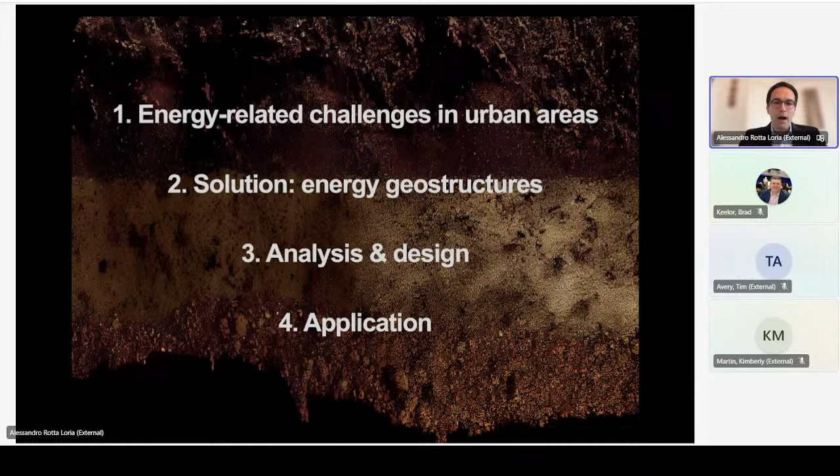Now, let's start by talking about energy-related challenges in urban areas, and why am I going to focus on urban areas? Well, because despite urban areas and cities occupying only 2% of the world's surface, they host up to 50% of the world population, account for 75% of the global energy consumption, and up to 80% of global CO2 emissions. So essentially, the message is that human settlements can span across different territories, but most of us live in cities.

Recent statistics indicate that every month, a new city the size of London is constructed around the world. So really, most of us live in urban areas. Urban areas consume a tremendous amount of energy, and due to the customary reliance on non-renewable energy sources, they are a big contributor to global warming and climate change.

Now, despite the current interest in the electrification of our world, if we break down the energy budget, the energy bill in our buildings, we can see how, depending on the country, 40 to 80% of the energy we consume is actually used for space heating and cooling and hot water production. If we take the city of Chicago as a reference, approximately 45% of the energy used in buildings is really used for these applications.

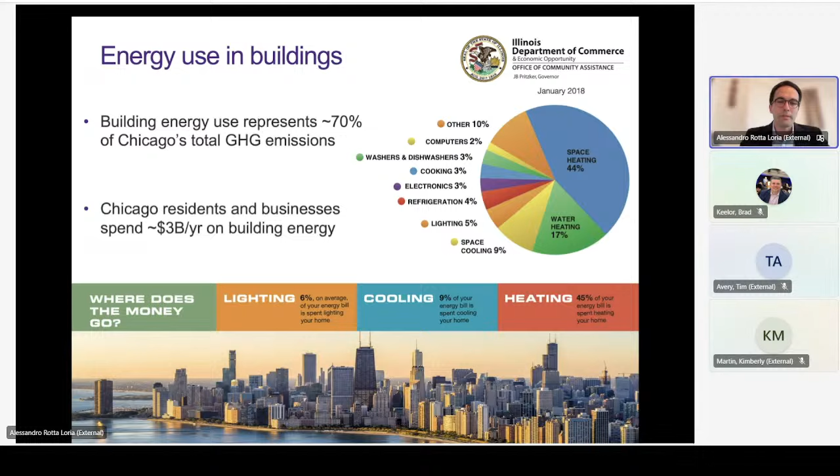Now, of course, electricity can be used to produce heating and cooling, but if we were able to source thermal energy directly instead of converting electrical energy into heat, we would have much more effective applications. A possible way to do this is through the harvesting of geothermal energy, the most abundant renewable energy source available on Earth right after solar energy, which I'm used to introducing by showing these two posters designed by Frederick Charles Herrick for the London Underground.

The message of these two posters is that when it's hot and sunny at the ground surface, temperatures are cooler below. And on the other side, when the ground surface is cold, it is warmer below. So the key message of these posters is that, from a broader perspective, the temperature in the ground beyond a few meters of depth is relatively constant throughout the year, being warmer than the ambient temperature during winter and cooler than the ambient temperature during summer.

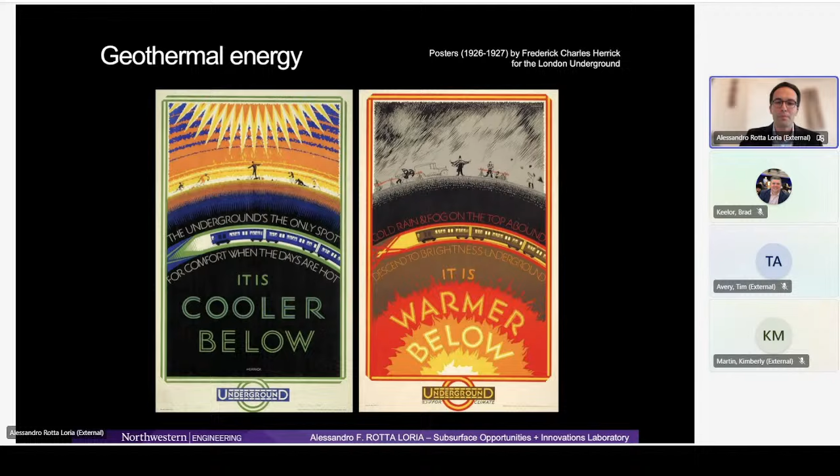And so essentially, all shallow geothermal technologies, or geo-exchange as we call it in the US, rely on this fact, that the temperature in the ground a few meters of depth is constant. This principle essentially allows us to source this heat for the heating and cooling of buildings and the production of hot water. Here you have data that have been measured in the ground around the world.

And really, you can see how the temperature remains relatively constant with depth. Of course, there is the geothermal gradient of approximately 3 degrees Celsius per 100 meters of depth. But if you consider the first, let's say, 100 meters of depth, you typically deal with relatively constant temperature, again, if you neglect the first 4 to 5 meters, where you do have an influence of the surface climatic conditions.

Now, this fact is valid everywhere on Earth, irrespective of where you are. Of course, if you are close to volcanoes, you are going to have more significant geothermal heat. But really, the fact that the temperature is constant is true everywhere. Now, if you instead consider cities, instead of rural areas, you can see how around the world, there typically is an offset in the temperatures with depth.

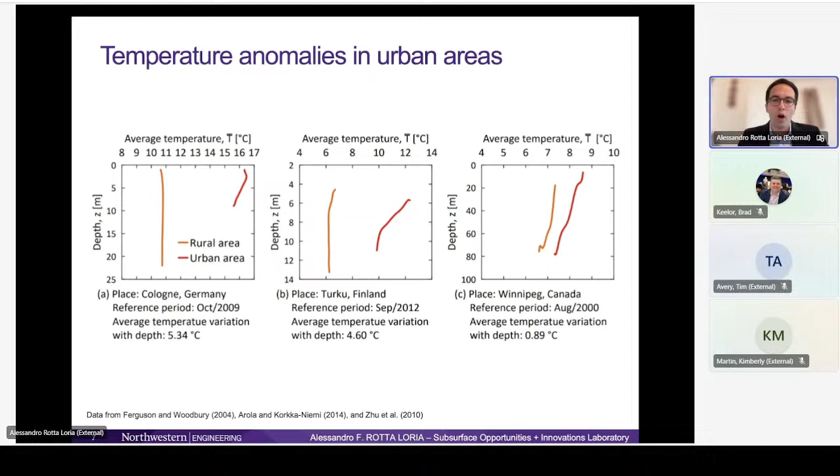And this is due to so-called subsurface urban heat islands, a phenomenon that essentially consists of an underground climate change associated with average temperature rises in ground temperature of up to 2.5 degrees Celsius per decade, which, put into perspective, is higher than the rate of surface global warming.

And this is due to the fact that all underground structures, such as building basements, parking garages, subway tunnels, train tunnels, and so on and so forth, continuously reject heat into the ground, no matter how well they are insulated. And so this is really causing an increasingly ubiquitous phenomenon.

And really here the message is that on top of having geothermal heat everywhere on Earth, when we are in urban areas, we also have substantial amounts of waste heat that we can harvest, and we can harvest it with geothermal technologies.

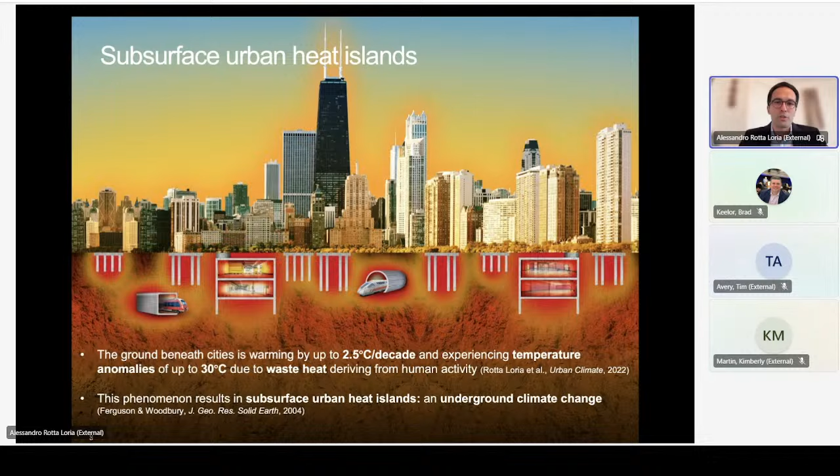Now, later in this presentation, I will show you how we can do that. But before that, let me expand a little bit more on this phenomenon of subsurface urban heat islands, because it causes various deleterious issues for urban areas.

First of all, it represents an environmental issue because rising ground temperatures affect seed germination and plant growth. It also represents a public comfort and health issue because there are hundreds of cases worldwide of people feeling thermal discomfort, for example those who use public transportation systems like subways, but also people who suffer from heat-induced diseases such as stroke and asthma and others.

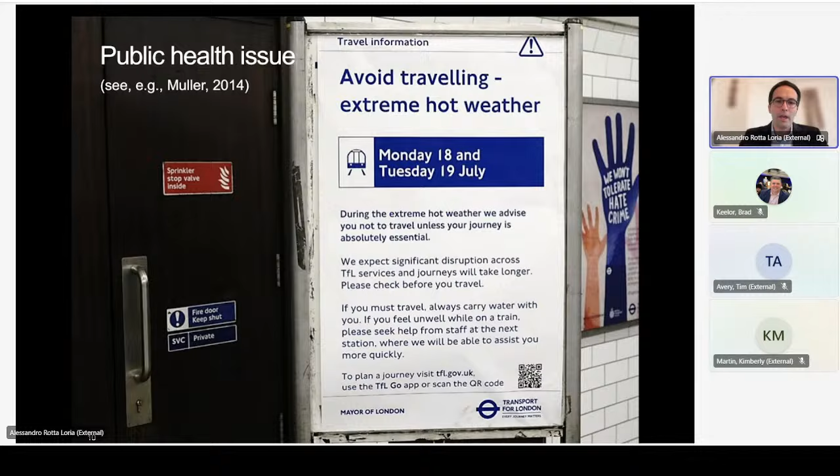On top of that, it also represents a transportation infrastructure issue because the rails of trains traveling underground can often be at the onset of buckling due to the very significant temperatures found underground, at least in some underground environments beneath urban areas worldwide.

Urban heat islands are an unwanted phenomenon that characterizes most urban areas worldwide. As soon as we build a building, some heat will dissipate into the ground, and so we generate temperature anomalies. As civil and geotechnical engineers, we know that soils, rock, concrete, and systems thereof, essentially the backbone of the subsurface, deform when subjected to temperature variations.

Materials such as concrete and various soils expand when heated, but some other types of soils, depending on the stress history, stress state, and other variables, contract upon heating. This phenomenon is often called thermal collapse.

Although over the years all the previous aspects about subsurface urban heat islands have been studied in detail—environmental aspects, public health and comfort aspects, and transportation infrastructure aspects—before the research I carried out with my group, there was very limited knowledge about the influence of subsurface urban heat islands on civil infrastructure.

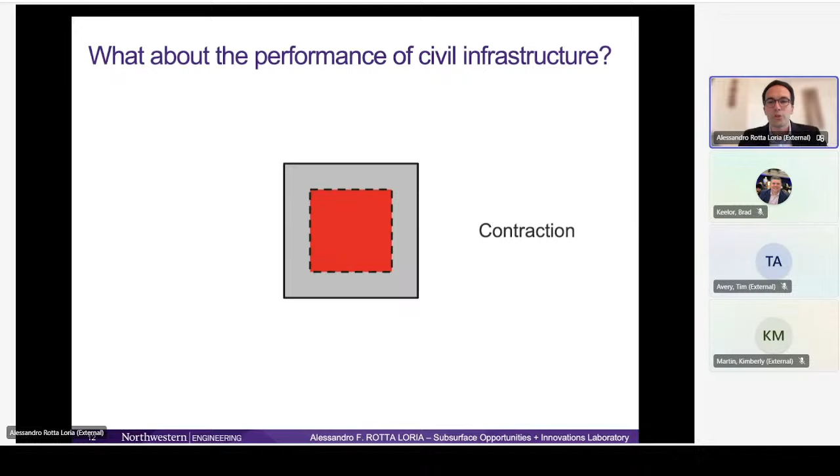So here we'll open a little parenthesis to provide one additional reason why we should harness this waste heat. The study we'll present, as introduced by Tim, has been featured by several media outlets across the world due to its wide implications for civil infrastructure, because as I will show you, it can represent, on a case-by-case basis, an issue for the performance of civil structures and infrastructures.

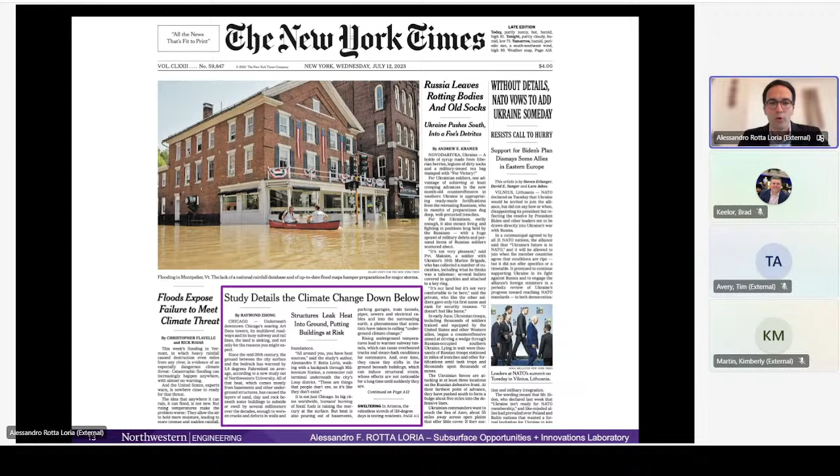But let me be more specific. For this study, because of geographical proximity, my team and I chose to use the city of Chicago, and specifically the Chicago Loop District, as a case study. The Chicago Loop District is actually the second densest district in the US after Manhattan in New York City, and is renowned because it's constructed essentially upon layers.

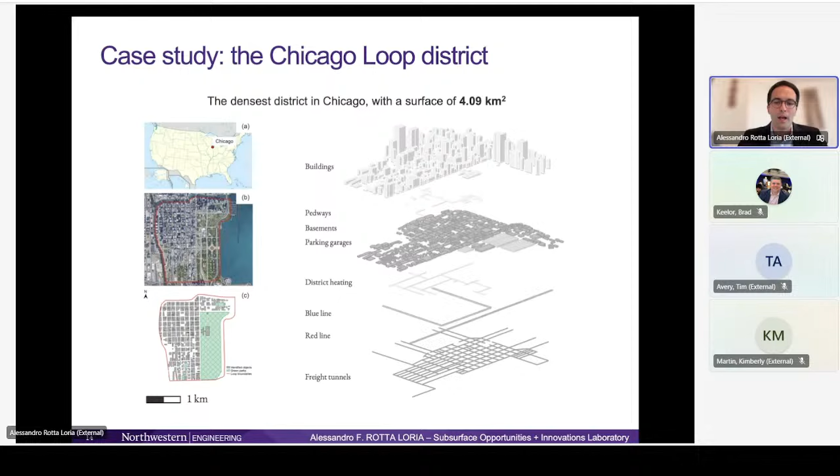There are a myriad of underground environments, such as building basements, a system of pedways, parking garages, subway tunnels, train tunnels, and also a very intricate network of freight tunnels that are currently not open but still in use by a number of companies.

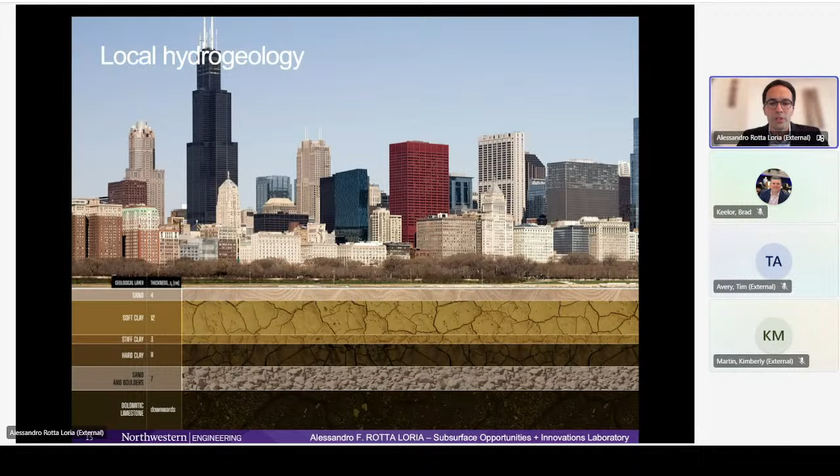The local hydrogeology of Chicago is also very interesting because it's quite diverse. It presents both fine-grained soils and coarse-grained soils, and the fine-grained soils present at the site can be both normally consolidated and over-consolidated.

As part of this work, what we did was essentially turn the Chicago Loop District into a living lab. For this, we deployed hundreds of wireless temperature sensors, both above and below the ground, with the aim to measure temperature, especially in underground environments, and quantify, seemingly for the first time, the intensity of the subsurface urban heat island beneath Chicago and its impacts on civil infrastructure.

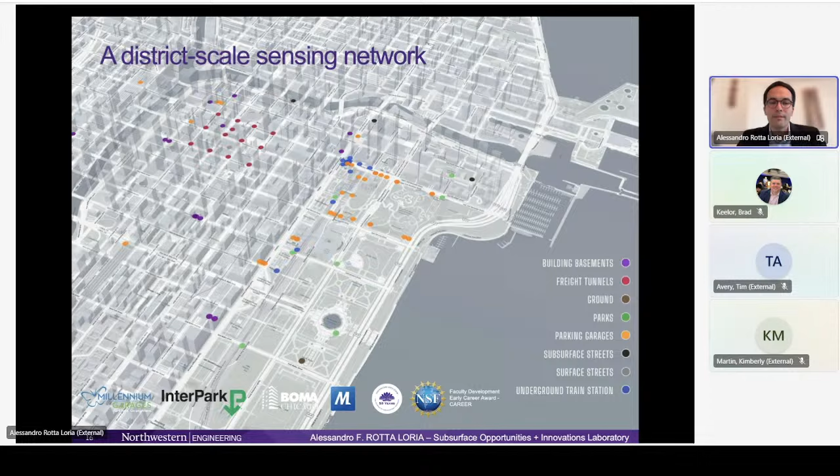Here we have an idea of what the sensors look like. Essentially, they are as large as an egg, and they can be easily attached anywhere and also embedded into the ground to measure temperatures. With this sensing network, we're currently able to gather approximately 20,000 temperature data points per day, which are allowing us to study in detail the development of this subsurface urban heat island beneath Chicago.

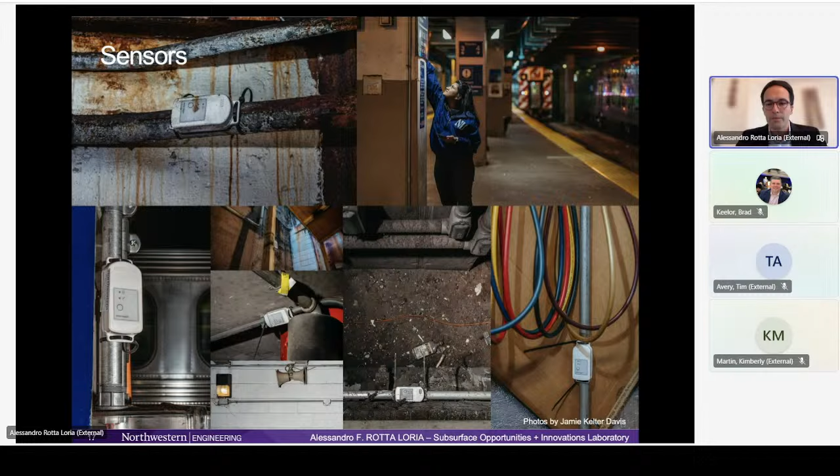Now, in this figure, you can appreciate how, with respect to the undisturbed ground temperature found outside of Chicago and also in relatively undisturbed green areas in the city, the temperature found in the ground beneath the Loop—here you have all these data points—is characterized by an offset. It's significantly higher, up to 11.5 degrees Celsius higher.

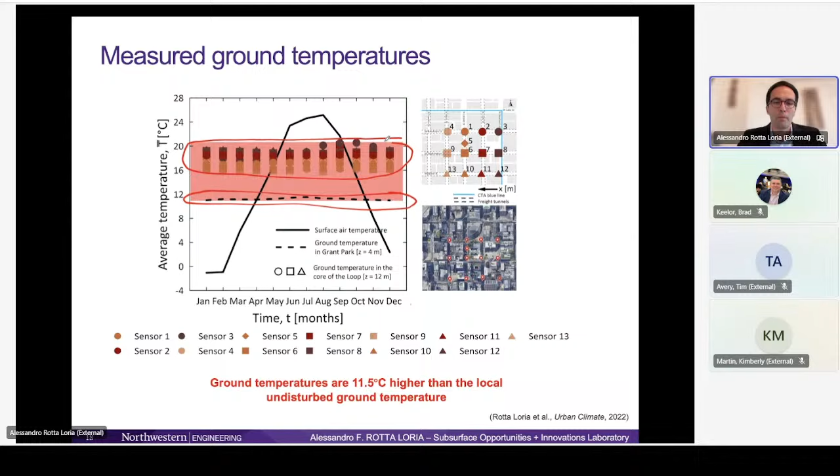Based on this data, we were able to assess the presence of a very significant subsurface urban heat island beneath Chicago. Again, it's not that something is particularly wrong about Chicago, but really it's the simple result of our presence and activity and our constructions. Most other cities worldwide suffer from the same phenomenon, if not more intense effects of subsurface heat islands.

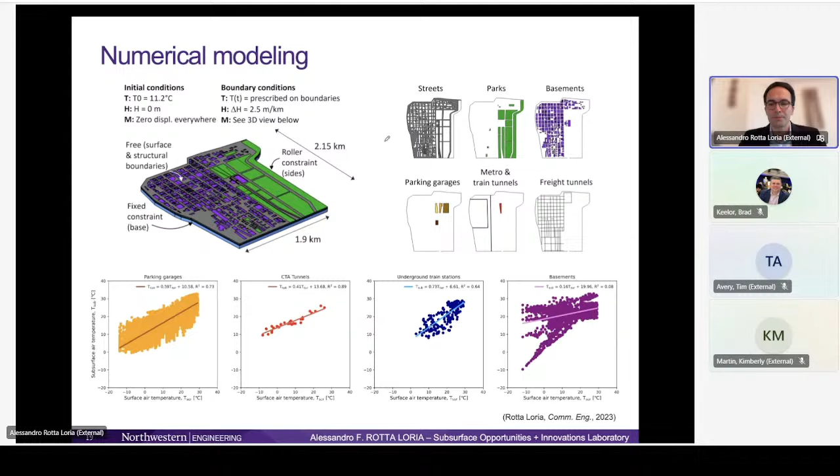Now, in order to study this problem more comprehensively, we built a numerical model of the entire district under consideration. We leveraged monitoring data to model the heat diffusion from building basements and other underground infrastructure into the ground, with the main aim of understanding if, without any calibration, we were able to reproduce the temperature data we can currently collect beneath the city.

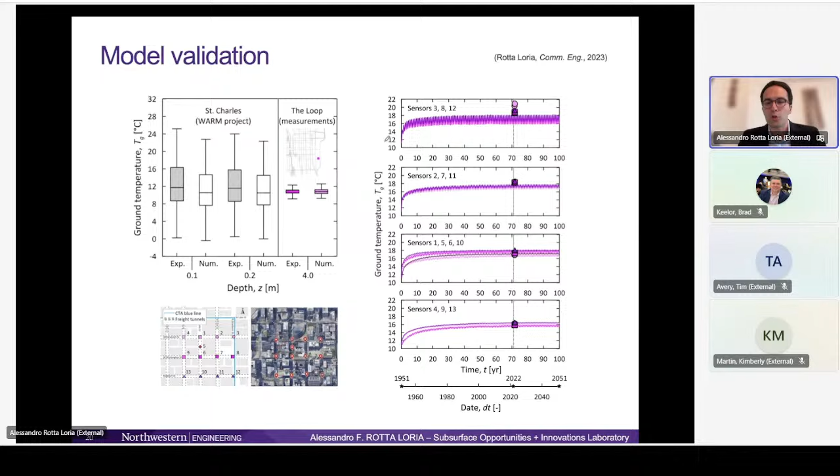In this slide, I'm showing that by simply considering the geometry of the loop and modeling the heat dissipated into the ground from underground structures, we were able to capture relatively well the temperature that we currently find in the ground.

Here's another snapshot of these temperatures, showing the temperature field in 1951. After one year, the morphology of the Loop was approximately similar to what we have today. Of course, new buildings have been built since then, but arguably on the same footprint as previous buildings. We also have the situation in 2022, in recent years, and the projected situation in 2051. What we aimed to do with these simulations was study in detail what happened in the past, what the current situation is, and what is likely to happen in the future.

As you can see, there were very significant temperature anomalies in the ground beneath the Chicago Loop. Darker is bad, lighter is okay—essentially, in those locations the temperature is more undisturbed. What you can appreciate is that the denser the buildings, the darker the colors, meaning the more significant the temperature anomalies. There is a very significant influence of urban morphology.

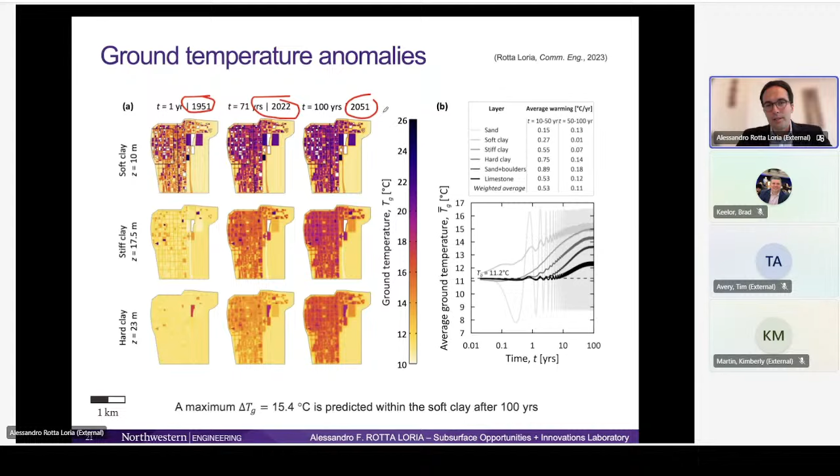As I told you before, we know that materials such as soils deform when subjected to temperature variations. As part of this work, we were able to quantify, seemingly for the first time, the deformations of the ground caused by these temperature anomalies. Depending on the layer, we assessed that soil strata were expanding or contracting, and the results of these and other studies I'm currently developing with my group indicate that these ground deformations are responsible for vertical displacements exceeding tens of millimeters.

The reason this is relevant is because we know, as geotechnical engineers, that displacements of that order of magnitude can be, on a case-by-case basis, problematic for the performance of civil structures, infrastructures, and geotechnical structures. In particular, they are unlikely to be detrimental at ultimate limit states, but they can represent a problem for performance at serviceability limit states.

So essentially, we're not talking about potential failure of structures because of this phenomenon, but about potential issues related to durability, long-term performance, and day-to-day operation—mostly related to the function and aesthetics of structures.

Because of all this—and this has been an exploratory study—we know more now, but we still know very little, so much more has to be done in the future. What's important now is to be aware of this silent phenomenon beneath our feet, and that there is a need to mitigate it.

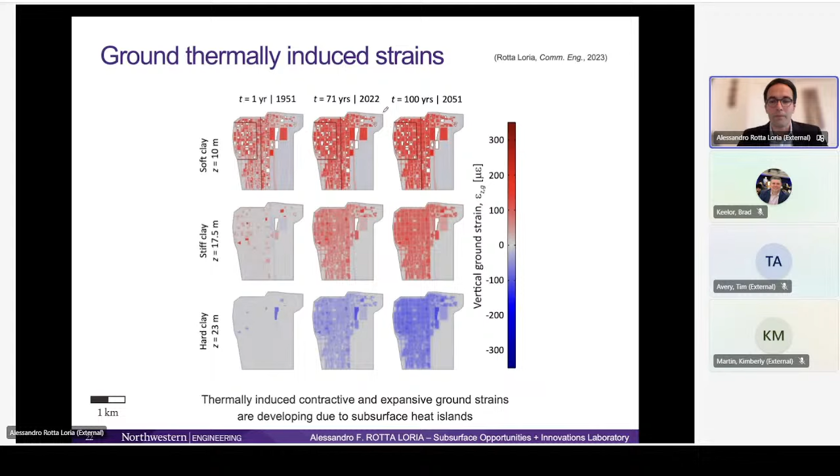How? Essentially, one of the possible ways to mitigate subsurface urban heat islands is to absorb this waste heat, and this waste heat can be absorbed through so-called energy geostructures. As I mentioned at the beginning of this presentation, all kinds of earth contact structures—such as building foundations, retaining walls, slabs, tunnels, and so on—can be turned into shallow geothermal heat exchangers, elements that absorb heat from the ground and use it for space heating, cooling, and hot water production.

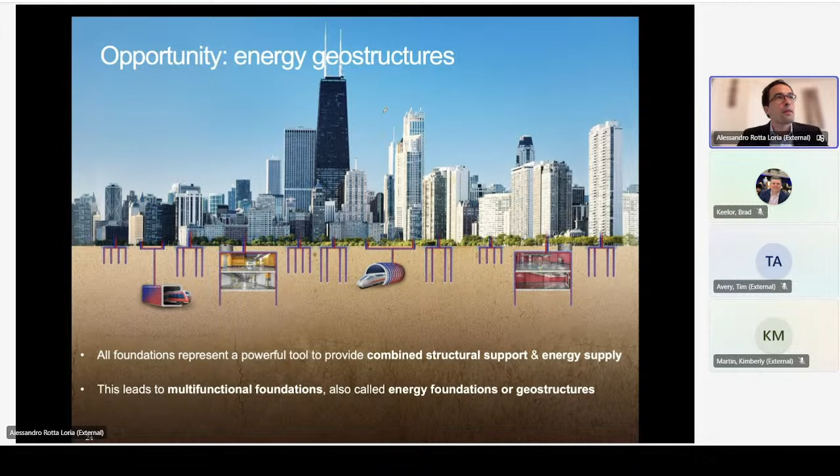So essentially, the concept of energy geostructures is that earth contact structures become renewable energy producers. In this slide, I'm showing what we generally call energy piles or geothermal piles. In black here, you can see the pipes—plastic pipes mounted along the reinforcing cage. Within these pipes there will be water with a bit of glycol, for operational reasons, circulating through the loops to harvest energy from the ground, extracting or injecting energy depending on whether heating or cooling applications are targeted.

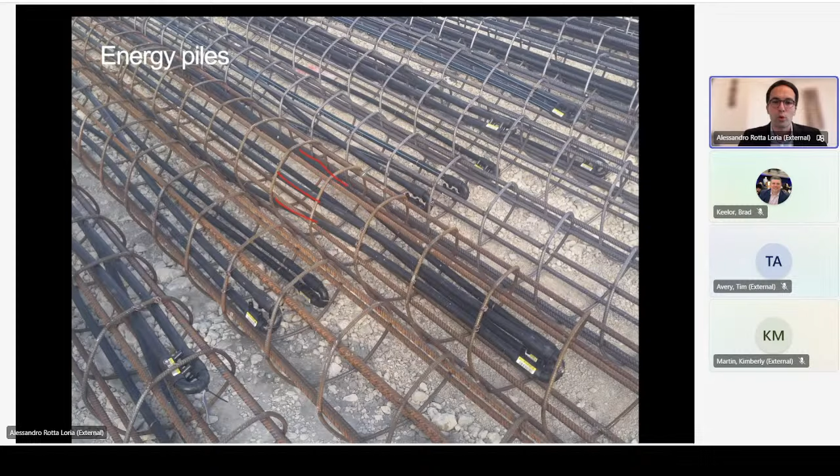In this slide here, you can see so-called energy barrettes or caissons, so very large foundations used to support tall buildings, energy slabs, energy walls, and energy tunnels as well. So really the message here is that any structure in contact with the ground can now be turned into so-called energy geostructures. And when dealing, for example, with tunnels, we now deal with massive sources of energy that not only can serve individual buildings, but can do that at the scale of entire city districts.

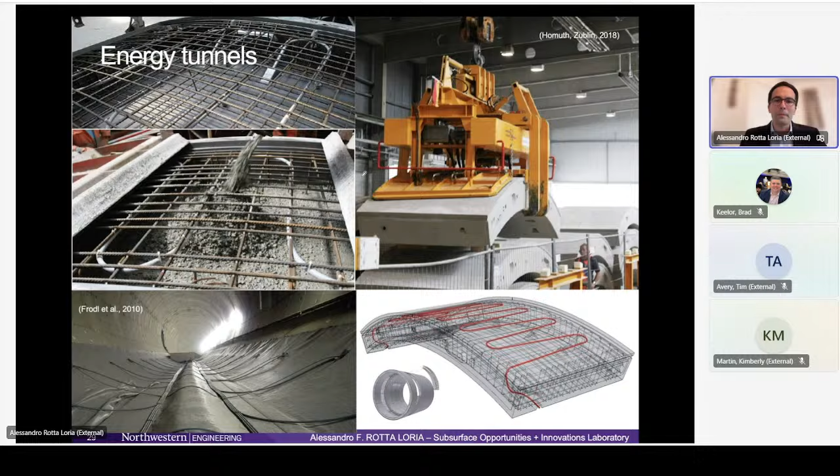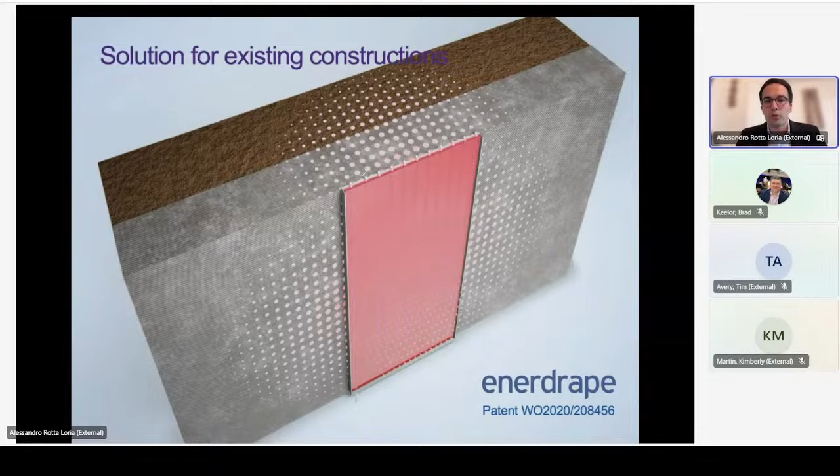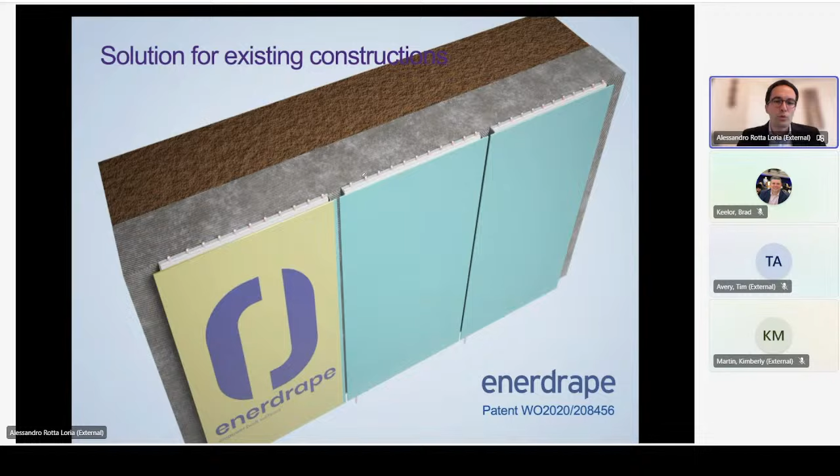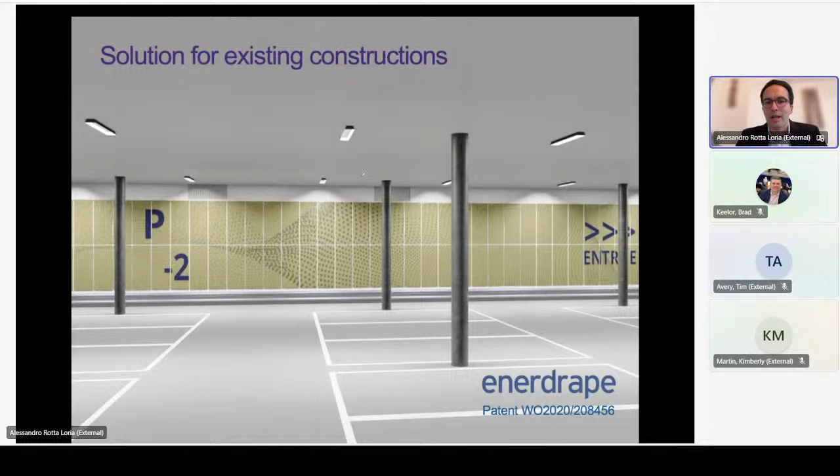Now, probably the only limitation of traditional energy geostructures is that they were applicable only to new constructions. And so in order to overcome the challenge, together with my collaborators, we came up with a technology called Enerdrape, which is essentially a geothermal panel that can be attached in contact to any existing earth contact structure and turn it into a shallow geothermal heat exchanger. Really, the operational principle is the same as traditional energy geostructures, but the advantage is that through this panel, which is made of aluminum alloy and embeds a piping network, it's possible to harvest heat from already existing underground structures that represent 99% of the building stock, as a matter of fact.

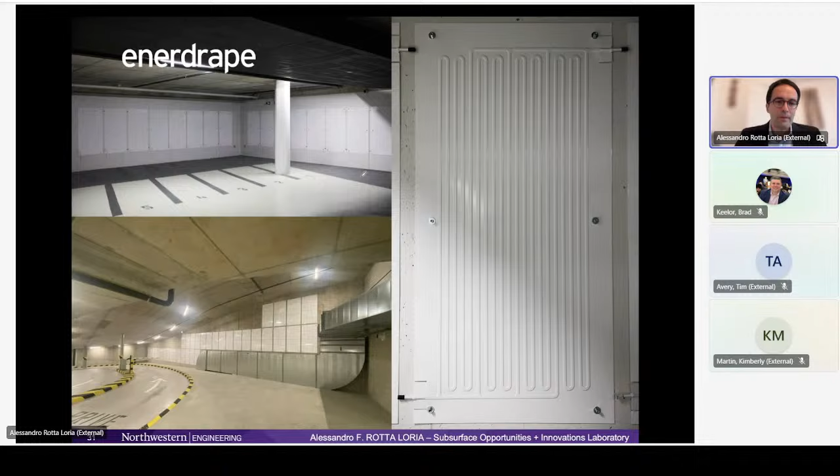Here you have an idea of really what the panel looks like. So again, it's very thin, thinner than an inch. It can be attached in contact to any plane or curved surface, and then cosmetic panels can also be deployed on top of it to ensure optimal architecture integration, or as a matter of fact, to serve advertising.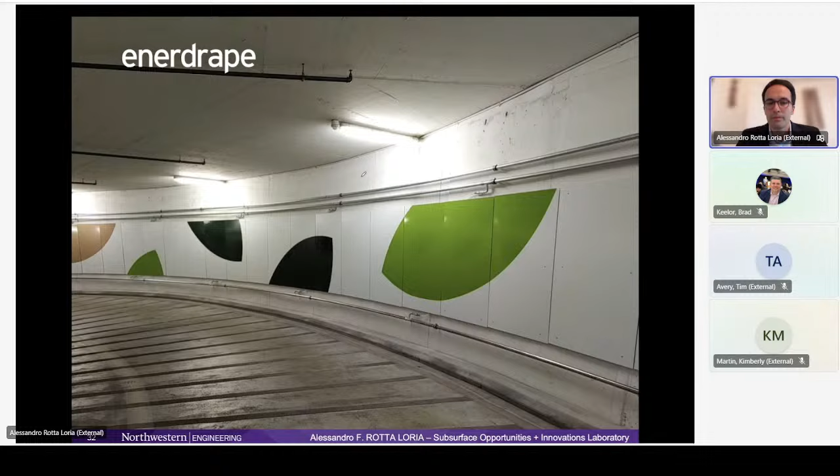Now, what are the uses of energy geostructures? As I told you before, heating and cooling and hot water production, which represent from 40 to 80% of the energy consumption of buildings. Energy geostructures can also be used for the de-icing of infrastructure, such as pavements, airport runways, and other types of civil infrastructure. They can be used for thermal energy storage.

So essentially, these technologies can be used to use the ground as a thermal battery, with efficiencies that, based on our studies, can reach up to 70%. In the case of underground infrastructure such as tunnels, their thermal activation enables a reduction in ventilation requirements. So essentially, what we can do is absorb the waste heat that, for example, is released by trains braking and people traveling underground. And also, energy geostructures and infrastructures can be used to sell energy to district heating and cooling systems.

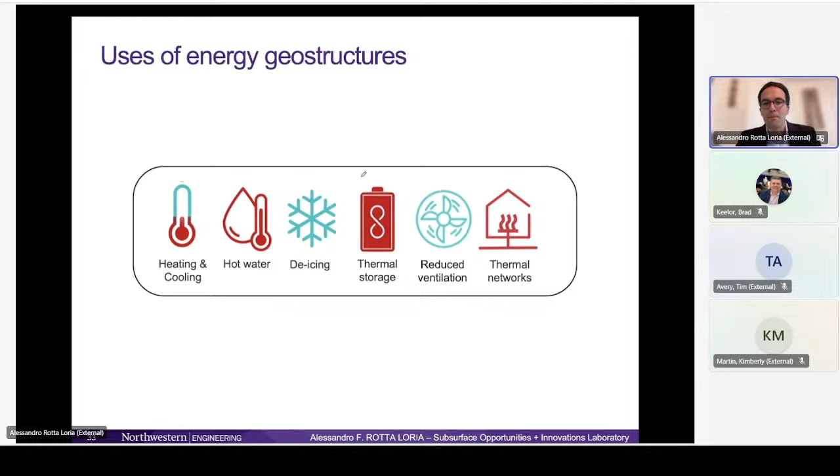So again, when you now deal with a parking garage, you deal with a multifunctional structure that not only can serve people, can let them park, can let them travel underground, but you're also dealing with a structure that represents a renewable energy carrier, a renewable energy source. So parking managers and operators currently become energy owners, and they can sell the energy.

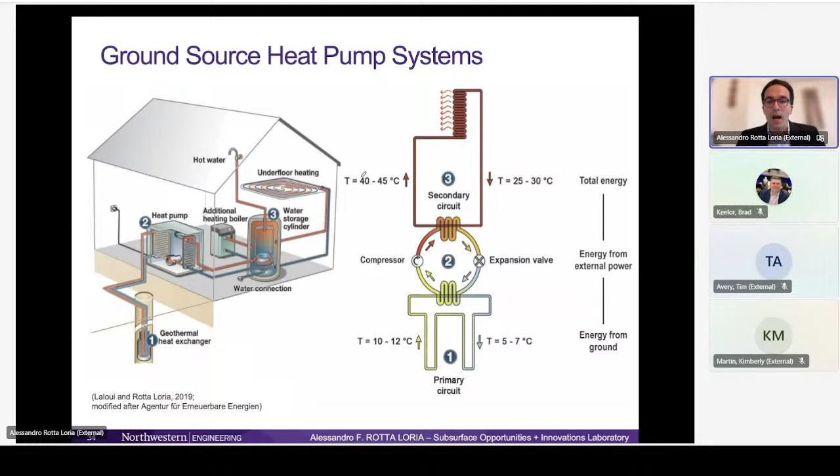Now, these technologies can be applied in exactly the same way as traditional geothermal technologies in so-called ground source heat pump systems. Heat pumps are used to essentially enhance the energy input that can be taken from the ground, with coefficients of performance that can range from 3.5 up to 6 and beyond in very favorable conditions. And really the advantage, I think, of energy geostructures compared to traditional geothermal technologies is that they harness structures that would be built in all cases, so they don't require additional drilling, and they limit land use, something that cannot be done with, for example, vertical borehole heat exchangers.

Because of these reasons, because of the fact that we don't need to drill specifically for the purpose of exchanging heat, these technologies are typically 20 to 30% cheaper compared to traditional geothermal technologies, with returns on investment that typically range from 4 to 15 years, with an average of 6. So the payback period is relatively good. Of course, it varies across the world. In the US, it varies across the state in which you are, and depending on whether there are tax credits available or not, but it's a fact that in general, it's something that can be very interesting.

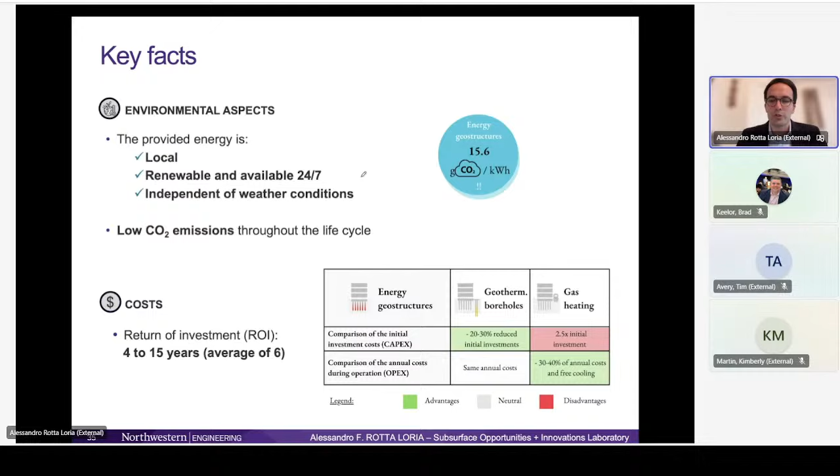Now, all of this is good. Now, what are the challenges? Essentially, due to the fact that we integrate a heat exchanger into foundation systems and underground infrastructures, we have energy-related challenges because we'll need to quantify how much energy we can harvest from the ground. We will deal with structural engineering challenges because temperature variations will be applied to the structures, and so they will deform. And we will also be dealing with geotechnical engineering challenges because of the thermal induced deformations that I was telling before.

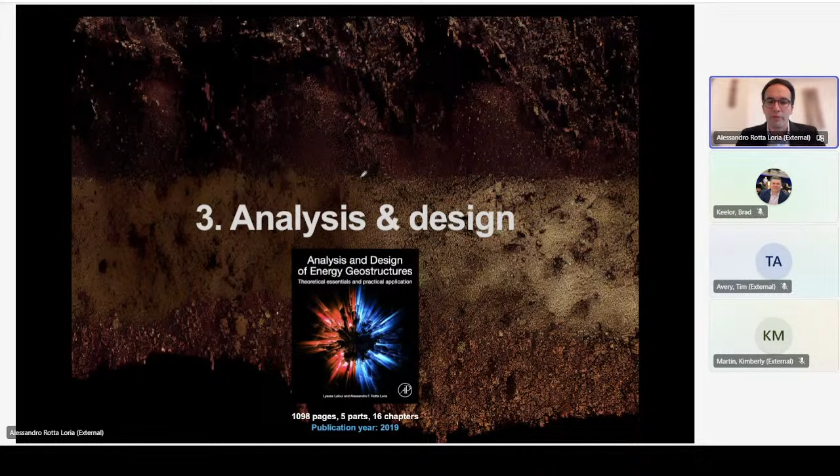In this third part of the presentation, I will touch base on a number of tools that, together with my collaborators, we have developed over the years to serve the analysis and design of energy geostructures. Most of these are summarized in the book I had the opportunity to write together with Professor Laloui from EPFL.

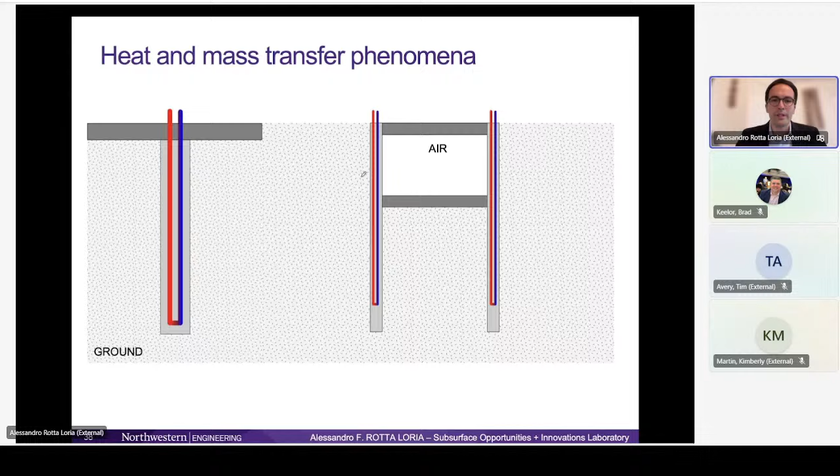To highlight the differences with respect to traditional heat exchangers and traditional geostructures, a key difference is the geometry of energy geostructures, whether we consider piles or energy walls. We have a number of heat transfer modes, convection and conduction, that can develop in the pipes, in the concrete, in the ground, but also, in underground infrastructure such as parking garages and tunnels, convection with the air.

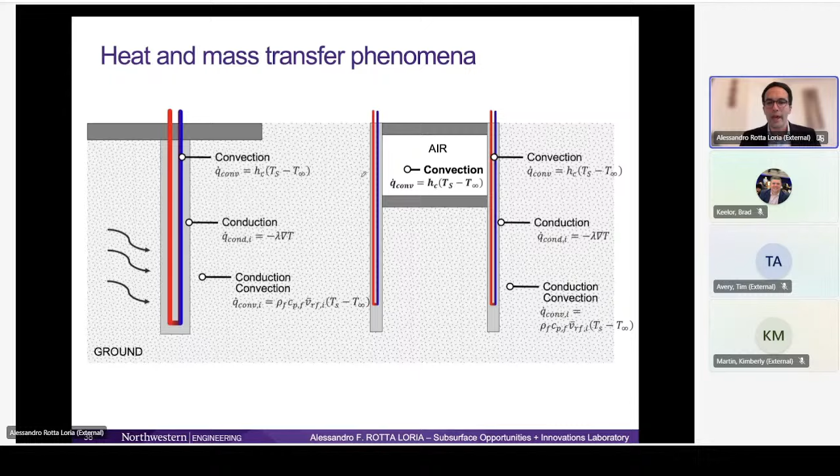So as I told you before, we can harvest heat not only from the ground, but also from the air when it's present adjacent to a given underground structure.

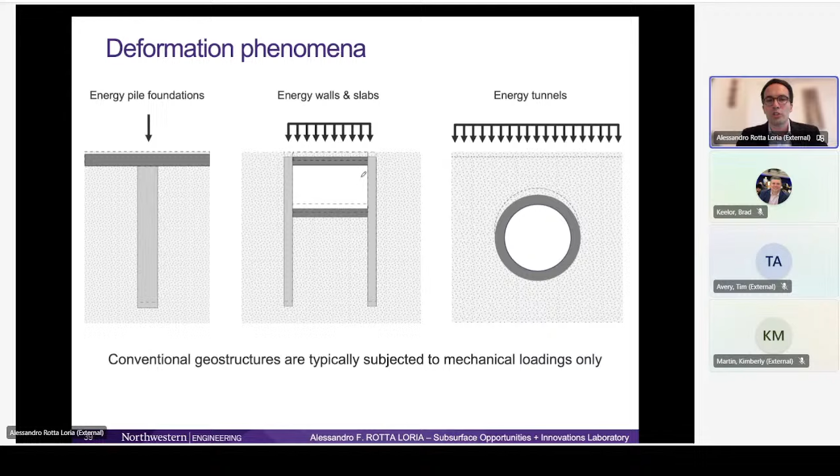With respect to the behavior of these technologies compared to traditional geotechnical systems, the main difference is that while traditional geotechnical systems were subjected only to mechanical loads, energy geostructures are also subjected to thermal loads, which lead to a completely different behavior and response.

When I started to work in this field, and even before that, my peers in the community knew very little about the behavior of energy geostructures. Over the years, there have been various developments in terms of tools to serve the analysis and design of energy geostructures. Currently, we have charts available for this purpose, and analytical models through which we can model energy geostructures in a relatively comprehensive and robust way.

Then, of course, there are numerical models, which are the most rigorous, comprehensive and thorough approach that can be used for this purpose. But these tools come at the expense of significant resources in terms of time and expertise in order to be carried out.

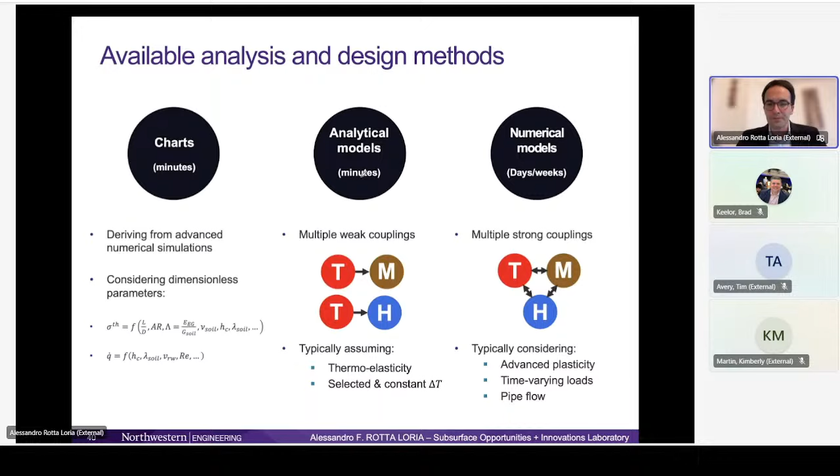Now, irrespective of the methods used, the message I'd like to convey is that at the end of the day, from an energy perspective, the challenge is to quantify how much energy and power can be harvested from the ground. And from a geotechnical and structural engineering perspective, the challenge is to quantify the significance of these temperature variations, which need to be considered in the design and serviceability limit states of these technologies.

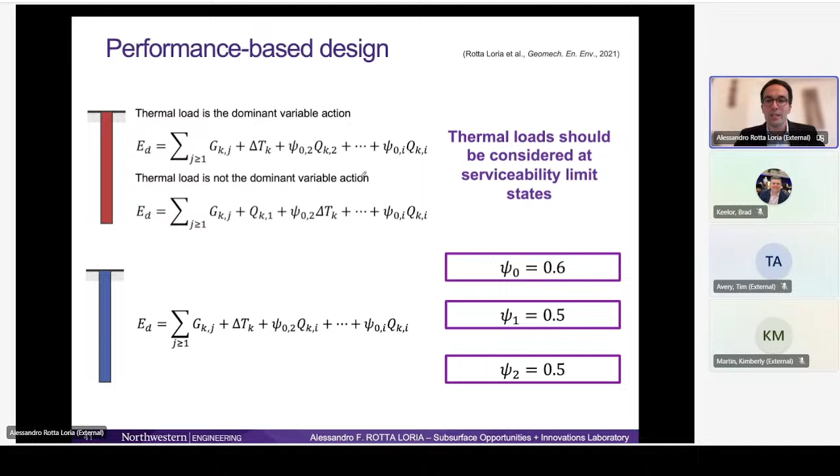As a matter of fact, energy geostructures, like all geothermal technologies, will apply temperature variations into the ground, but they will be generally more limited. In any case, their operation will allow us to absorb, for example, the heat that comes from subsurface urban heat islands that was mentioned before.

In the following, I will touch base on the main features of some of these tools that have been developed over the years, starting with charts. The idea of charts is to have schematics, quantitative data sets that enable us to quantify, for given geometries, site conditions and so on, what energy and power can be harvested from the ground, and what are the effects from a mechanical perspective on the structure and the ground.

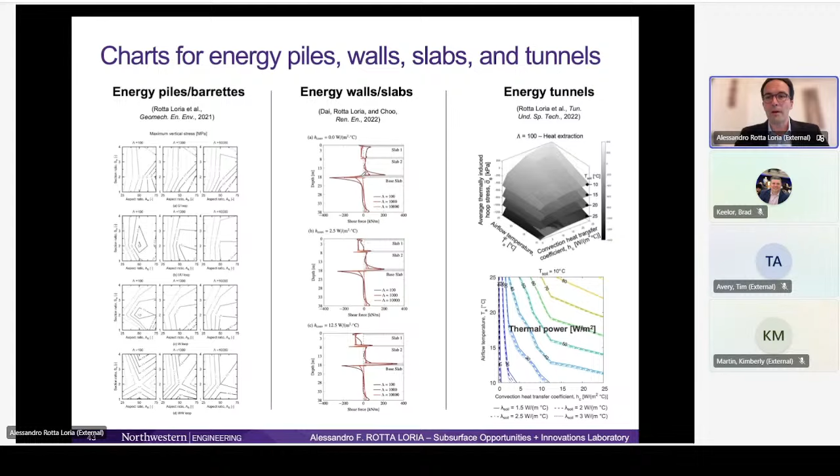There are currently charts available for piles and barrettes, walls and slabs, and tunnels. These are only a few of all those that have been developed by my team and many other colleagues and peers in the community. The overarching aim of all these charts is to serve quantitative estimates that can still be rigorous. In general, they can provide values that are plus or minus 20% accurate of what will eventually be found in practice, for use in schematic analysis and design.

Then there are analytical models, and the main advantage of analytical models is that they can be more tailored to the actual site conditions and characteristics of sites. Over the years, a number of models have been developed. Here I will touch base on three main models developed by myself and my collaborators: the interaction factor method to describe the mechanics of energy pile groups and account for group effects, the extended Winkler analysis for energy walls and slabs, and also, recently, we're working on an extended cavity expansion analysis.

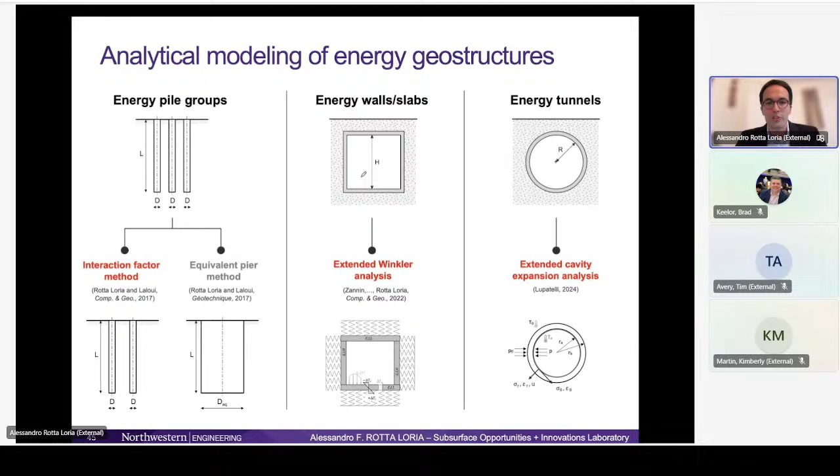So really here the aim is to take some of the most fundamental solutions in mechanics and geotechnical engineering and extend them to non-isothermal conditions in order to be able to consider the influence of temperature variations.

Let's start with the interaction factor method to really analyze energy pile groups. The method is quite simple and essentially resorts to the quantification of the so-called interaction factor between a pair of piles that can be identified for any pile group.

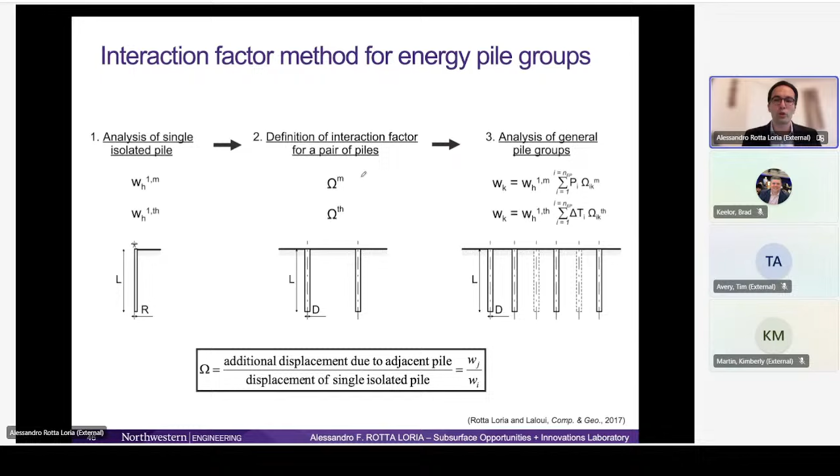This interaction factor is essentially a coefficient that depends on the spacing, the geometry of the problem, and other features, and is defined as the additional displacement due to an adjacent pile over the displacement of a single isolated pile. What we can do with this approach and the elastic principle of superposition of effects is to really calculate what are the interactions between any piles in a group, and eventually determine what is the overall group deformations caused by not only mechanical loads, but currently also thermal loads.

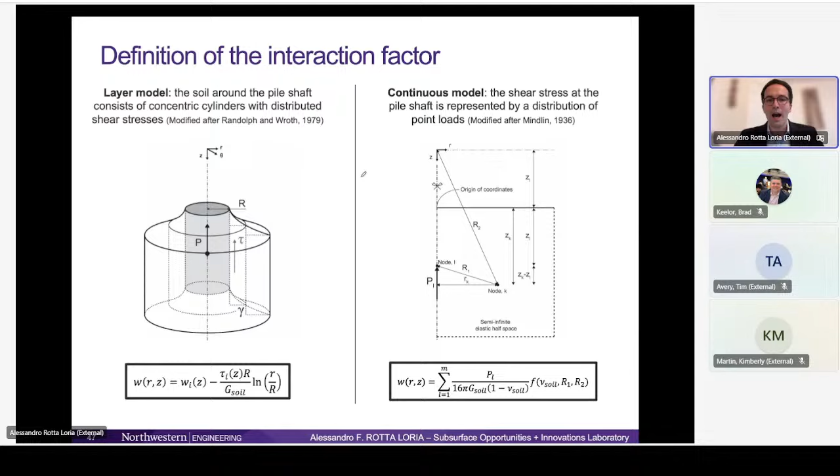In order to define the interaction factor, we specifically extended two analytical models that really allow us to quantify how much piles will deform due to the loading and presence of neighboring piles.

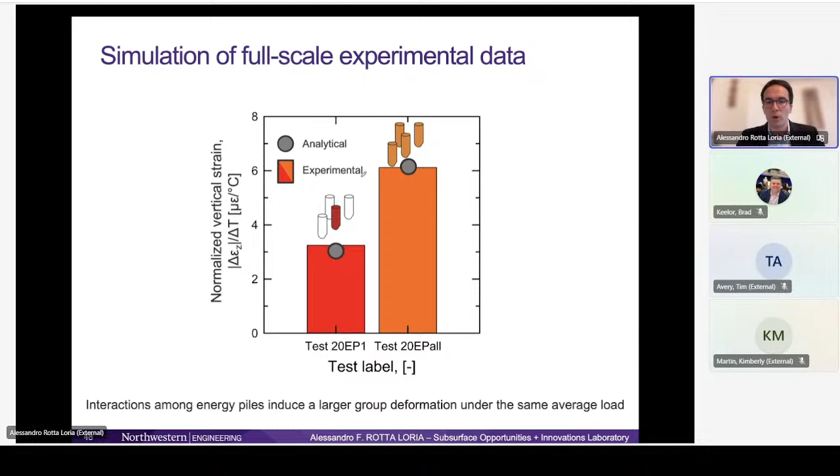Eventually what we can get are results like this, where we can really simulate quite well the values of vertical strain or vertical displacement at the head of these foundations. You can see that essentially for a larger number of thermally activated piles, the group deformations increase. This is exactly the rationale for having a method like this one to really study group action and effects for analysis and design purposes.

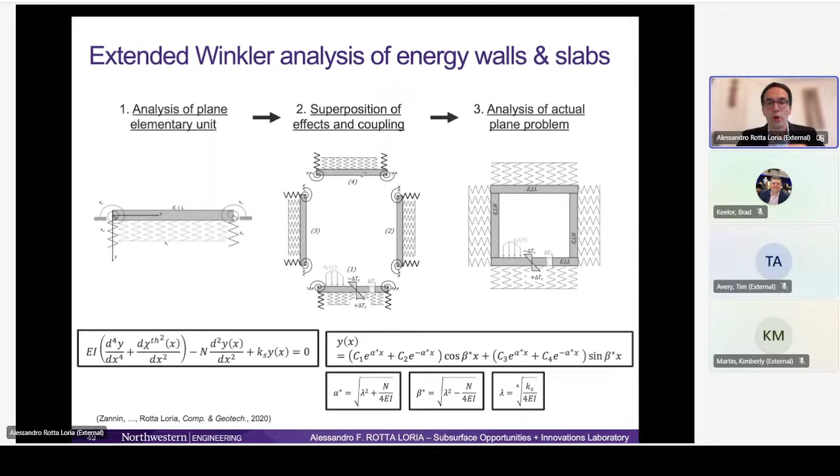In order to address the analysis and design of energy walls and slabs, what we did again with my collaborators was to extend the classical Winkler solution to non-isothermal conditions and really use this basic solution to analyze one elementary unit, in much the same way we did previously with the interaction factor method, to then be able, with the elastic principle of superposition of effects, to model and simulate the behavior of more complex plane geometries, such as cut and cover tunnels.

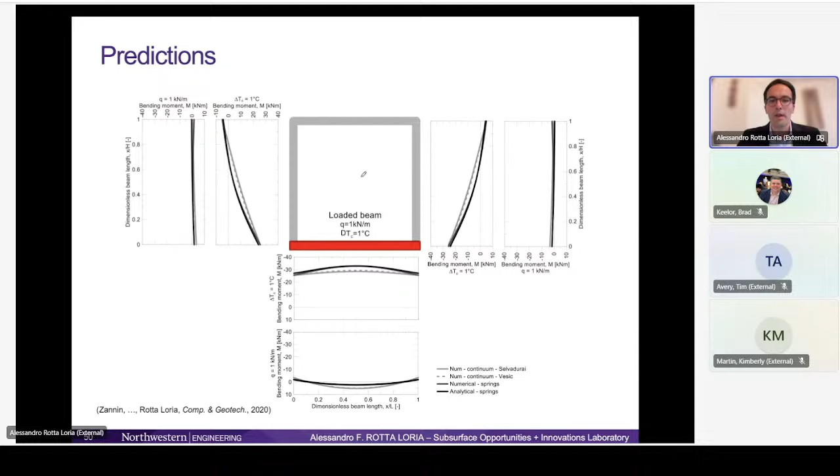So what can be done with this model is predictions like this. Essentially, for any given plane underground structure, we can quantify the influence of the thermal activation of one element on the other elements in terms of internal actions such as bending moments, shearing forces, normal forces, and so on. In turn, we will be able to consider these thermal induced effects in the design.

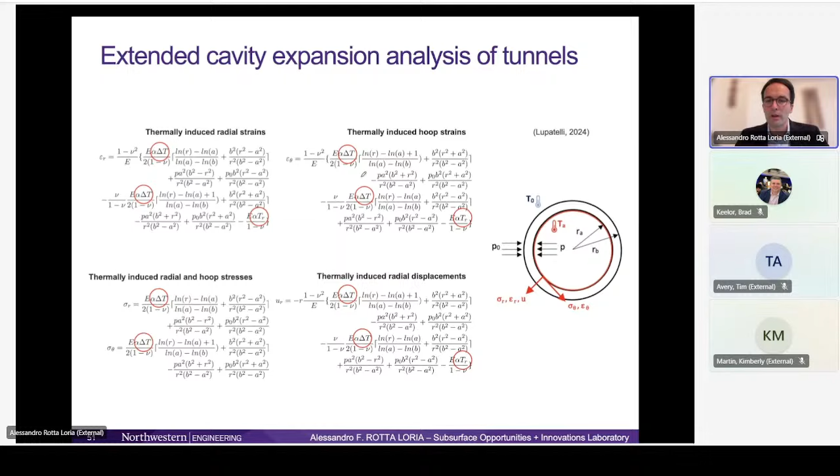When we come to tunnels, and this is work in progress, what we're doing is extending the cavity expansion analysis and cavity expansion theory to account for temperature variations applied to these underground structures, with the aim of being able to calculate radial stresses, hoop stresses, and displacement caused by temperature variations.

Now, as I told you before, the most rigorous approach are numerical models. These are the most rigorous approach to really simulate, analyze, and design energy geostructures. There are a number of formulations that can be used for such purpose, but essentially what these approaches allow us to do is model the heat transfer, mass transfer, and deformation phenomena that occur in the subsurface.

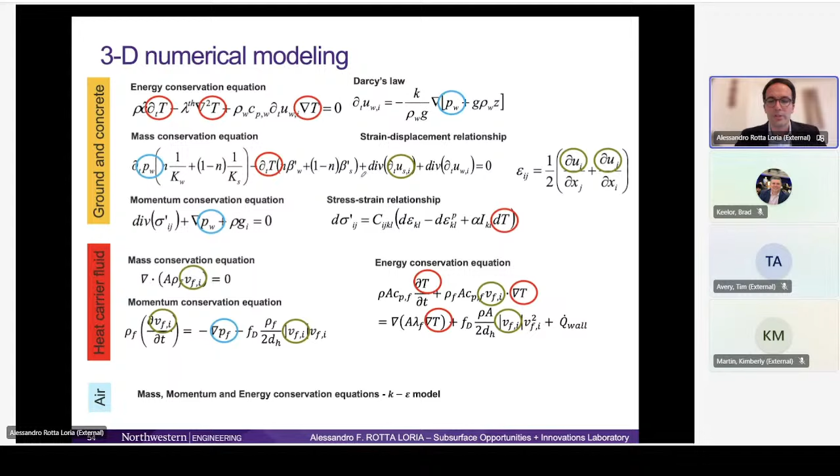I will not go into very specific details of this, but rather focus on a number of applications that have been designed with these latter types of methods by my collaborators at GeoEg. I'll kick off with this example that represents a tower under construction that will be powered by geothermal energy. It's an office tower for which the foundation systems were thermally activated.

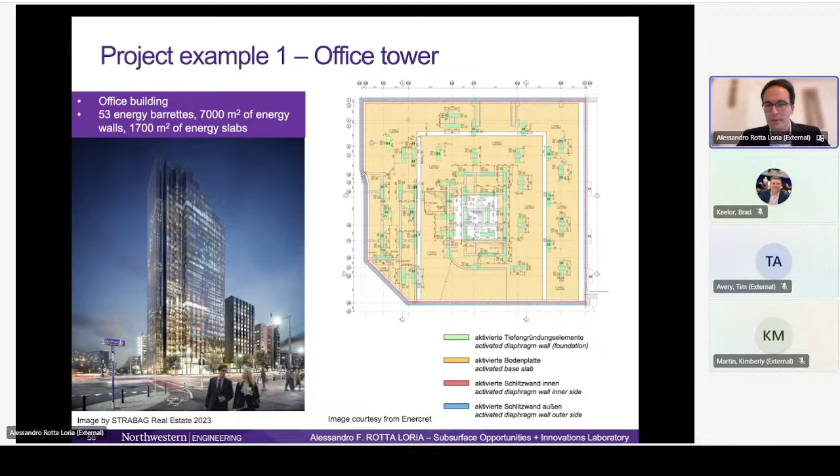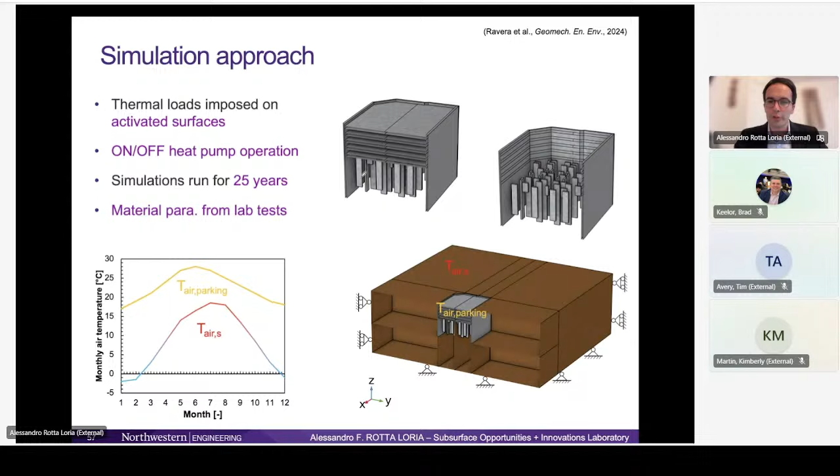The foundation system is specifically composed of barrettes, slabs, and walls. Essentially what numerical models allow us to do is, as I showed you before, reproduce in detail the three-dimensional geometry of these underground constructions, consider their thermal activation, and really study over time what is going to be the energy and power that can be harvested from the ground, and what are the thermal induced stresses, deformations, and displacements that will be caused into the structure.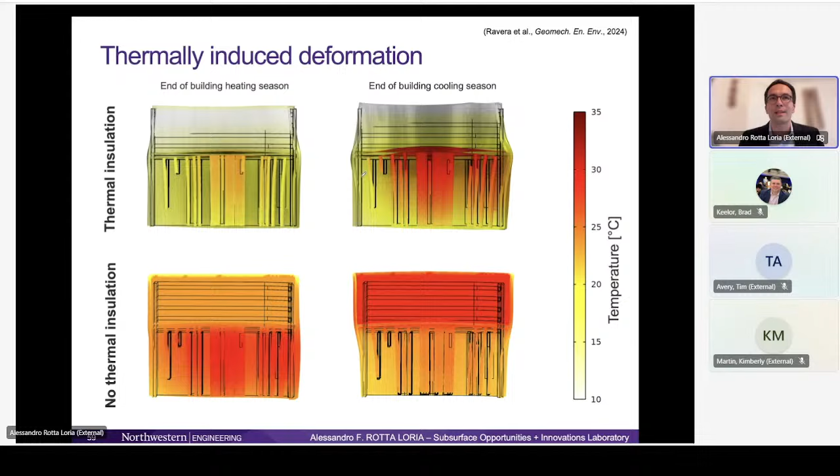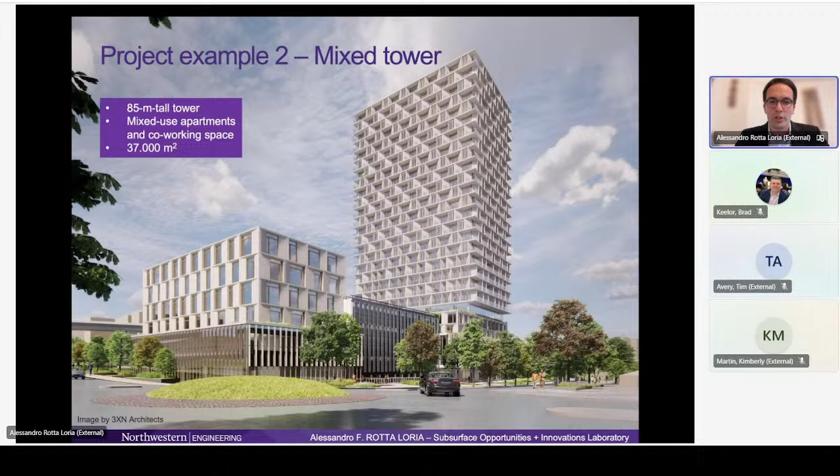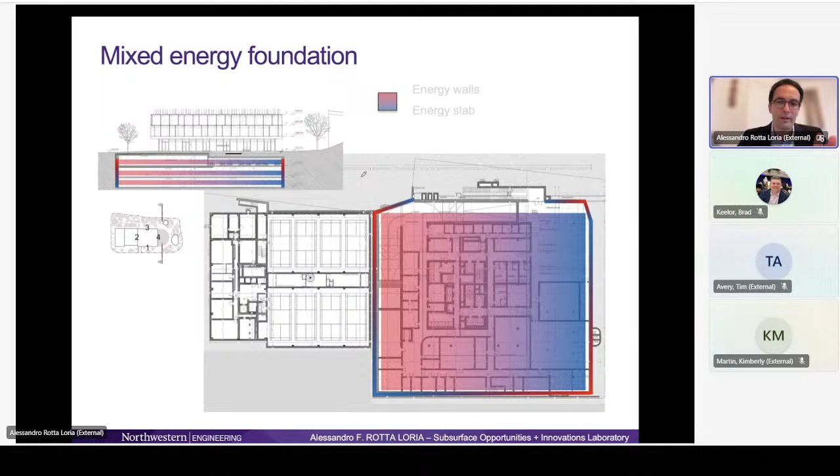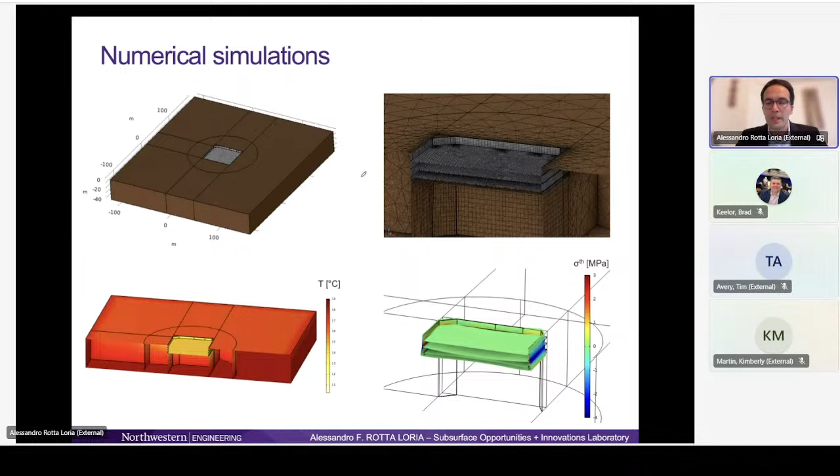As a second example, I would like to share this other one that represents a mixed tower currently under construction in Switzerland, whose foundation was again thermally activated to contribute to the thermal energy needs of the building. We specifically deal with thermally activated slabs and walls. Again, in this case, numerical models enable us to simulate in detail the performance of these structures for even very long time frames of 50 years and beyond, which are typically required by standards as design lifetimes.

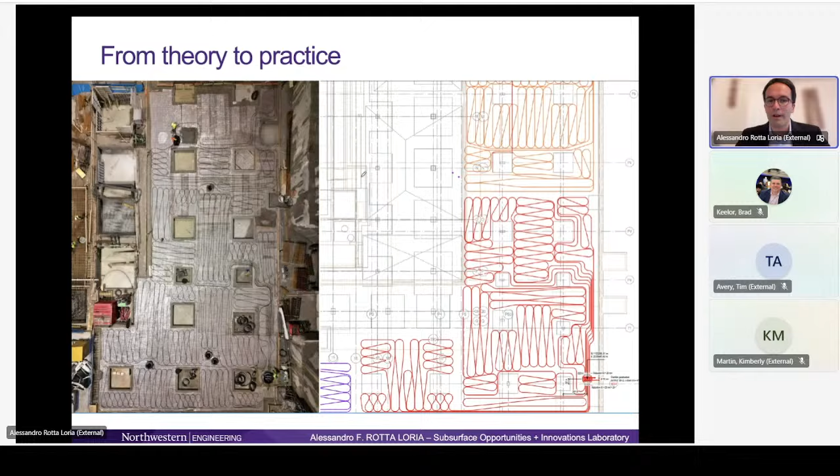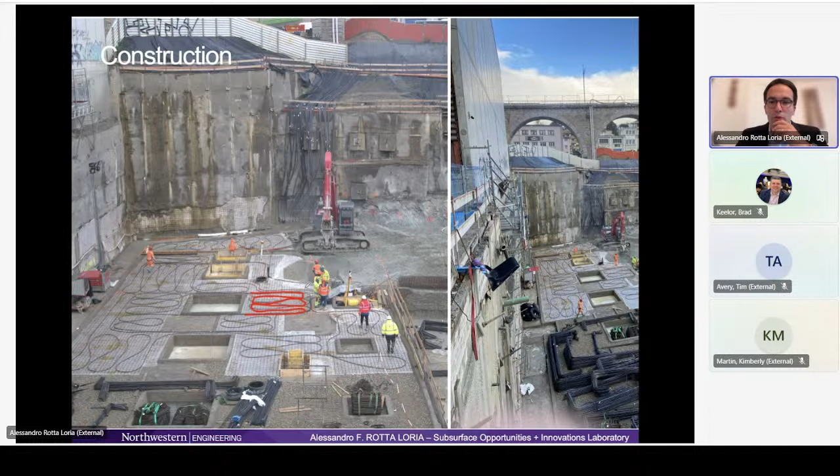From theory, we can then go to practice. So here you have a snapshot of what the application of the pipes at the construction site looks like compared to what was initially foreseen. Of course, there can be a number of differences, but overall, good installation practices will ensure that these technologies will function well. Here again, you have two other pictures of this installation, and as you can see, you are dealing with kilometers or miles of pipes with water circulating through them. That water enables you to absorb heat from the ground, or to inject heat into the ground if you do cooling, for example building cooling.

Now, to conclude this presentation, I would like to convey three main messages. The first one is that subsurface urban heat islands, also called underground climate change, represent a silent hazard for civil structures and infrastructures, and so more work is deemed necessary in the future to really assess where and to which extent this can be the case.

At the same time, though, I hope I was able to convey the message that this phenomenon represents a massive opportunity, because we can absorb very substantial amounts of waste heat from the urban underground on top of geothermal heat. And energy geostructures, as a matter of fact, represent one of the possible solutions, but a very cost-effective one, that enables us to do this while supporting our structures and infrastructures.

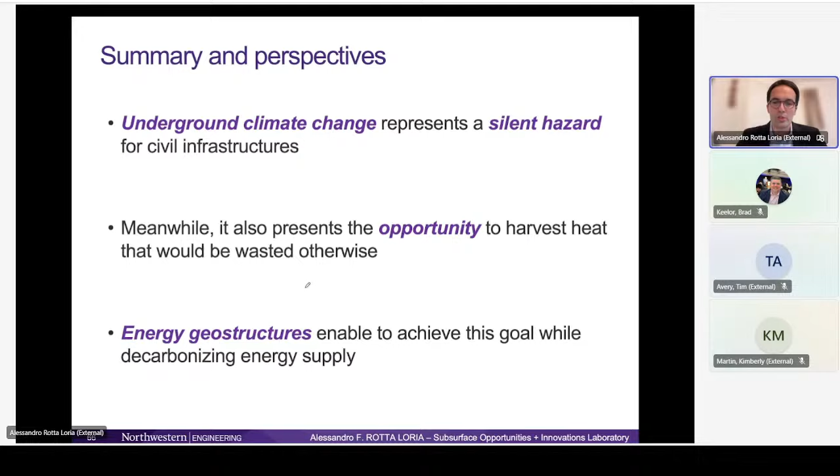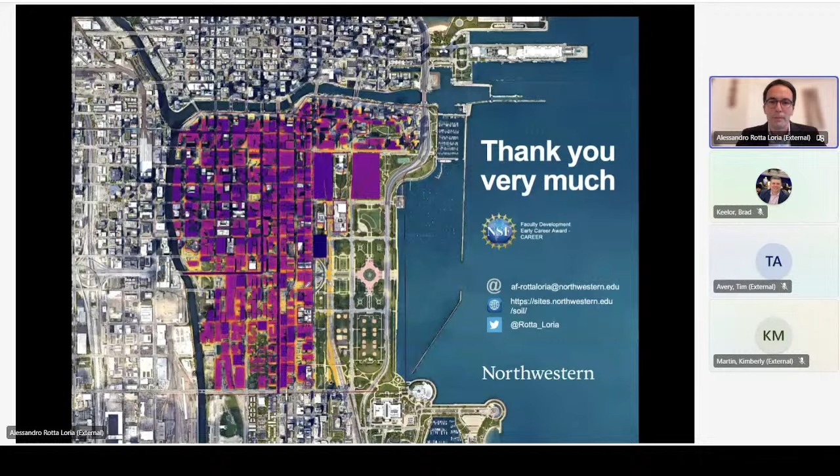Thank you, and I'm happy to answer any questions.

Well, that was outstanding. Thank you very much, Alessandro. Please, if you do have questions, put them in the chat in your video there. I'll start off with a couple. Do we need to change the design of energy geostructures compared to traditional earth contact structures?

Yes, the short answer is yes. As I mentioned in the slides, the influence of temperature variations needs to be considered in design, not at ultimate limit states. So temperature variations resulting from the geothermal operation of these technologies do not involve ultimate limit states, but they can affect serviceability limit states. So we're talking about problems related to deformation, but rather than re-envisioning and restructuring completely the design, we simply need to perform a few checks.

Typically we need to control compressive stresses, tensile stresses. We need to limit these effects. We need to limit deformations, deflections, and so on and so forth. And to date, even in practice, there have been very few cases, I can count them on a few fingers, of designs that needed a change. In those cases, solutions can be to change the class of concrete or increase the reinforcement and so on and so forth. So there are solutions. But in short, yes, the effects of temperature variations need to be considered in design.